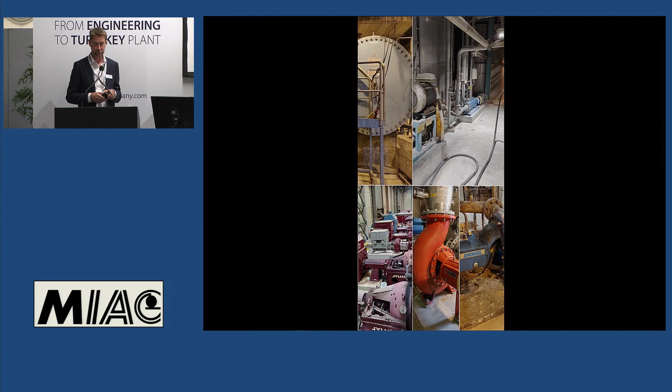As a starter, it looks like this, and if you work in a paper mill or deliver projects, you can think about how many equipment do you have? How many mechanical seals can you find in this plant of yours?

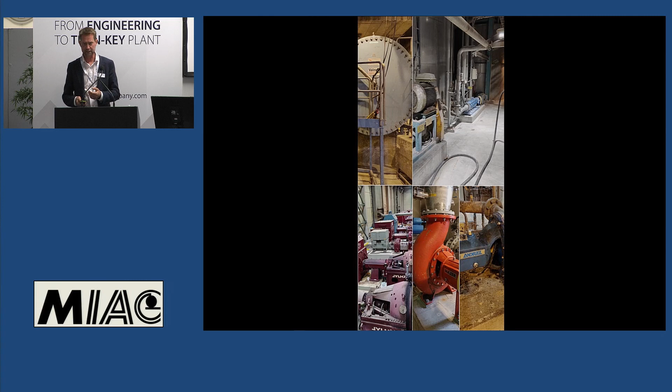And then we go to a bit of detail about the mechanical seals. Mechanical seals are categorized by their function. You can have a single-acting mechanical seal, double-acting mechanical seal, or quench seal. The idea here is that if you have a single-acting mechanical seal, you have one pair of sliding faces, and it's lubricated by the product, so your stock, the fiber suspension.

Then you can have a quench seal, which means that you have a bit of a flush in the back of the mechanical seal, which removes the leakage and gives a bit of cooling. That's a bit of a compromise between a single and a double-acting mechanical seal. A double-acting mechanical seal is then where you have two sets of sliding faces and you pressurize it with water. The idea here is then you have absolutely no leakage of the product, and the mechanical seal is lubricated better, so you get a much better performance out of it.

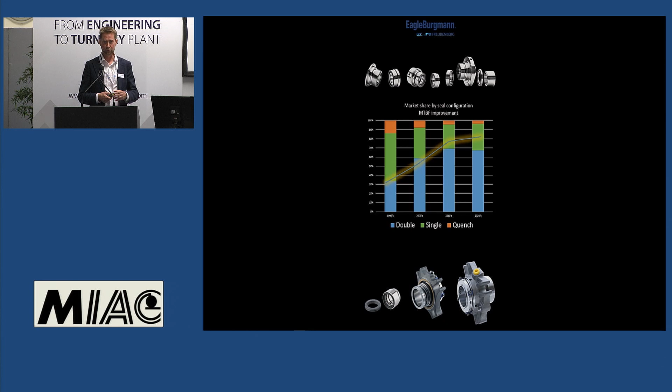Now, during the 2000s, our customers noticed that if you use a double-acting mechanical seal, the MTBF, the mean time between failure, goes up. So obviously, over the years in the 1990s, we delivered maybe 30% double-acting mechanical seals, but that grew to roughly 70%. And the quench seals are pretty much vanishing.

So we pushed, as an industry, to use double-acting seals, put in water in the seal, and you get better lifetime. Lifetime goes up from 3 years to maybe 6 years, 6.5, or something like that.

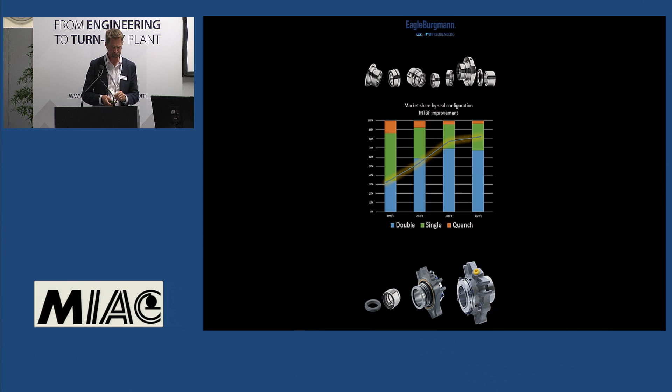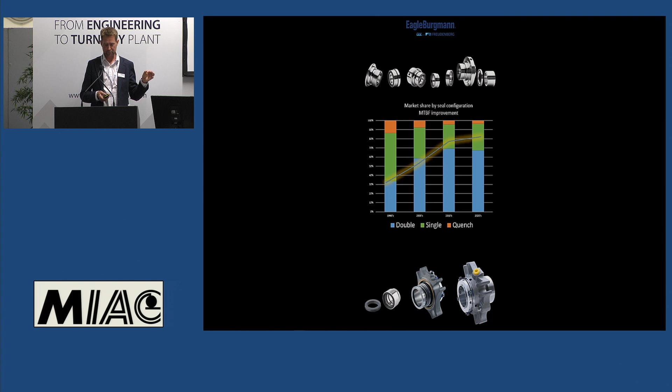So now most of the seals are double-acting, only condensate seals and pump seals are single, but at the same time, what did we do? We taught you to use more water. We doubled the amount of seal water that you're using in your plant.

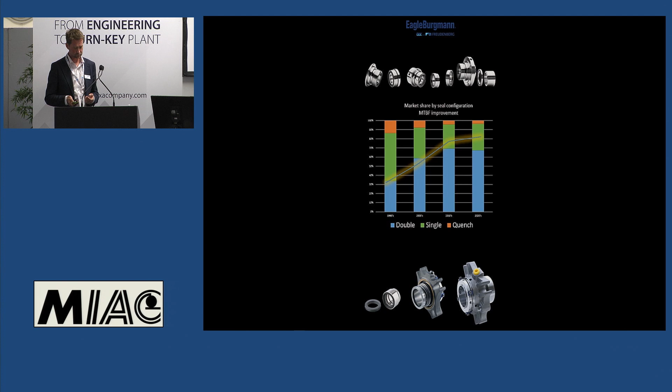So you have to somehow control that amount of water that you're using. Of course, engineers invent ways to reduce the water consumption. You can have thermosiphon systems, which are very popular in the chemical industry and oil and gas. This would be Plan 52, 53A, and so on. Or then you can have a water line.

Now, in a paper mill, you have lots of water everywhere. You have the water lines available. So this was a natural choice that you put a Plan 54 water line system to all these mechanical seals. Plan 54 sounds nice, but in essence, you have 2 Sulzer Ahlstar pumps or hundreds of ACPs, small size, and they produce all the water that all these mechanical seals in the plant use.

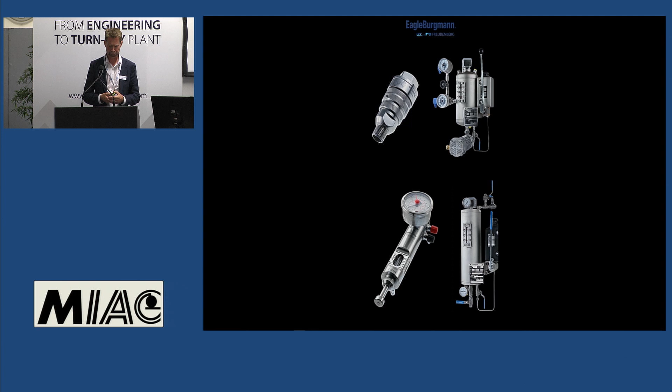But if you just connect the water line and flush it through the seal, that would be 10 to 20 liters per minute. So a company in Finland called Kytölä eventually came up with a flow control device, and now all mechanical seal companies are selling them. Different kinds, but in essence the same. You restrict the flow coming into the seal. You have 2 knobs where you control the flow and the pressure.

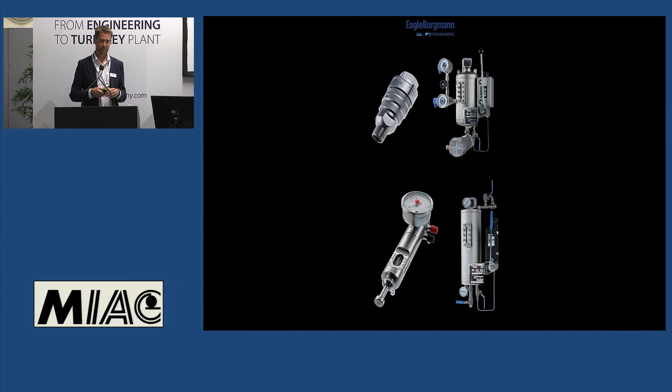So the point is, then we'll show you that you restrict the flow to 4 liters per minute, 2 bar higher than what you have in the pump. All good, but there are still 2 problems with this thing. 4 liters a minute, there are very many minutes in a year. So when you add it all up, that's quite a lot of water for one mechanical seal. And we made you double the amount of double-acting seals you had. So it all adds up.

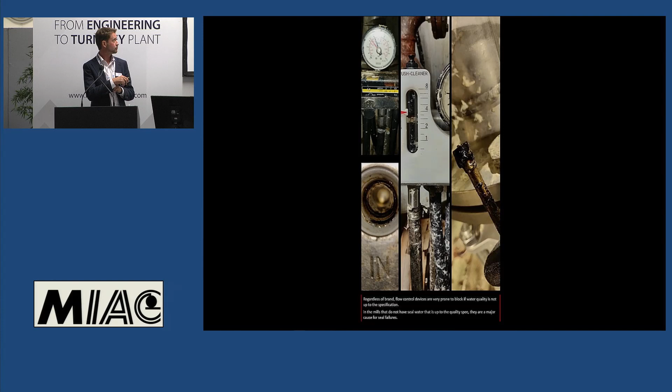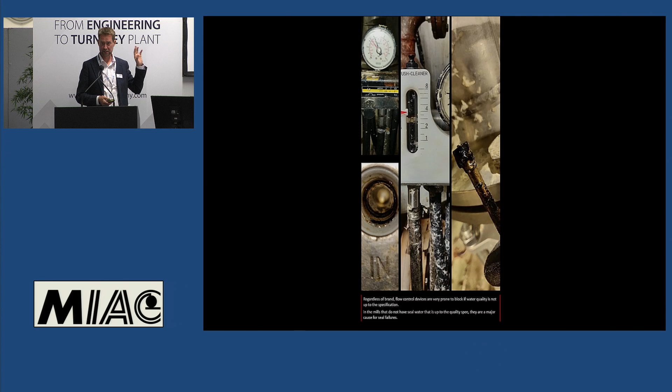And when using these, another problem in my mind is that they are in front of the seal. We specified that the mechanical seal water has to be very pure, but that is almost never the case. It's taken from the nearest river, mechanically cleaned, so it's not chemically cleaned water. It's not potable water, it has dirt in it, organic material. And regardless of whose flow control device you're using, this is in front of the seal, and all the dirt gets clogged in this equipment.

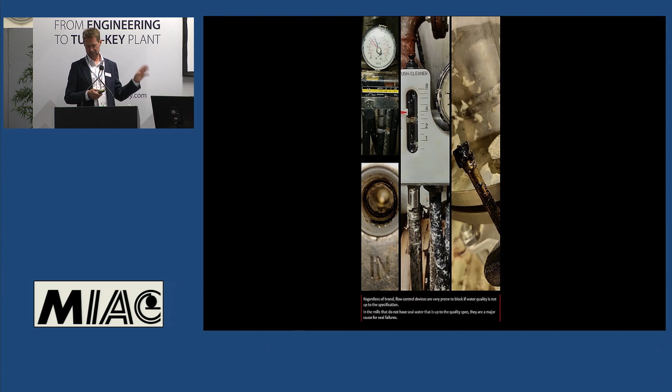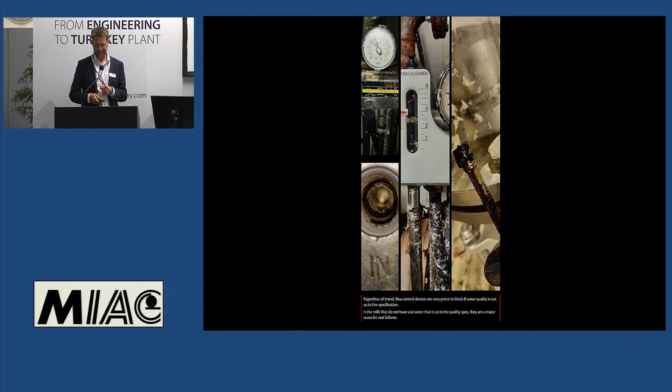So you have reduced the water consumption, but when this blocks, the water stops to the seal and it needed it for lubrication and cooling. So now we are breaking the seal, saving water, but at the same time causing problems with this water saving and restriction of the operation. But anyway, this is what we have been doing all the time. We have been telling 2 bars above the process pressure, 4 liters a minute, adjust it, install these kits, and you put them everywhere in your mill. And my personal opinion is that this is perhaps not the best way to do it.

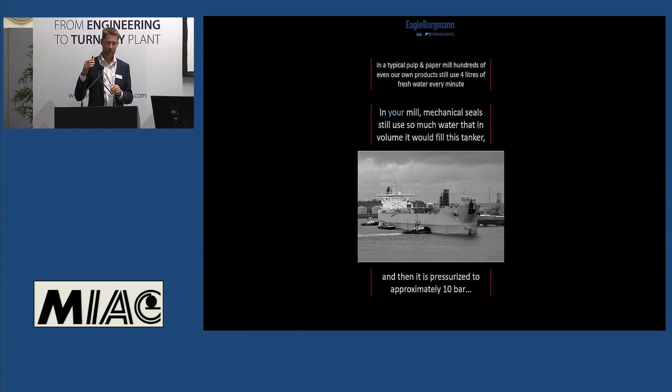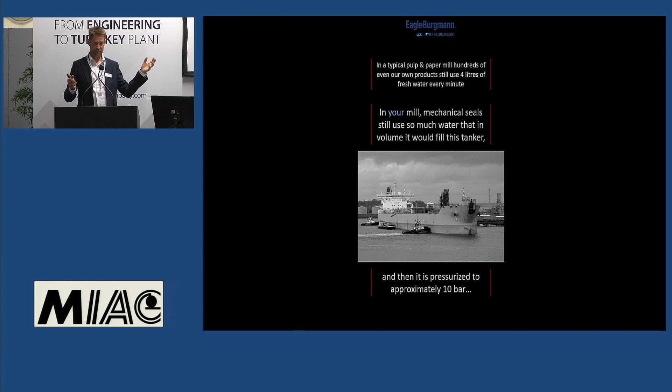So if we take a bit of a story now, the number of mechanical seals or pumps and equipment that you have in your mill varies by mill size, but let's say 50 to 200. That's the amount you typically have in a smaller tissue mill or a larger two-line carton board mill or whatever. When you add up all the minutes and 4 liters per minute, it adds up to 2,000 cubic meters per mechanical seal per year. Now when you add that times the amount of equipment you have, the total volume is going to be a tanker. If it's 50, it's going to be a small tanker, 50 times 2,000 cubic meters. If you have 200, the amount of water will fill a super tanker. That's how much water we're talking about.

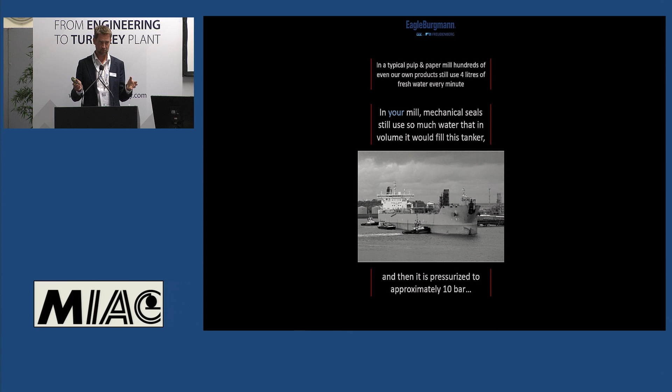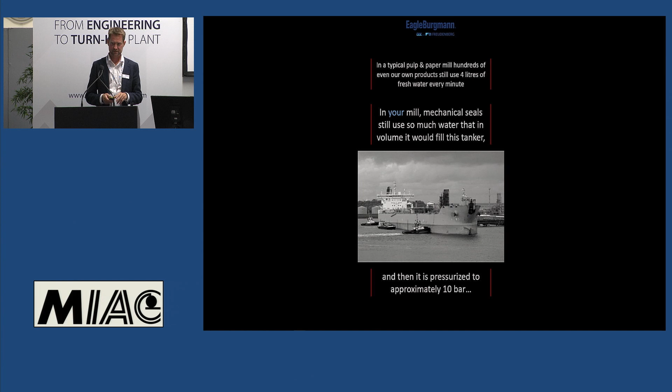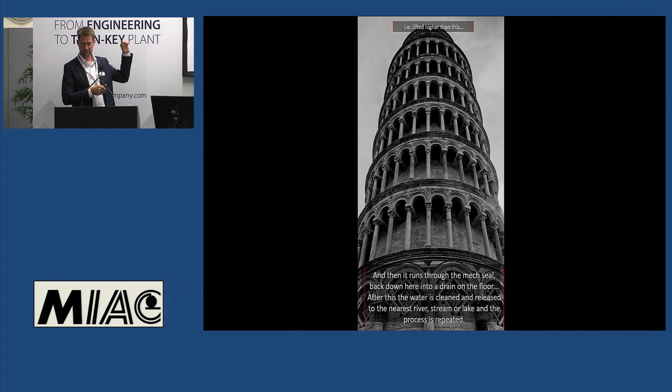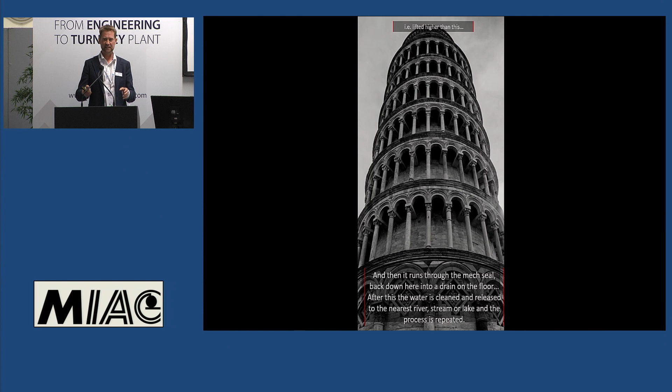And the next thing is that we tell you, you have to pressurize it with those pumps to about 6 bar, 10 bar, so that it's always higher than the process pressure you're running in those pumps. And what does that mean? It means you take that tanker and your seal water pumps, lift it all the way up here, up to a height of 60 meters, 70 meters. And after that, you open a valve, adjust it a bit, and all that water runs through the mechanical seals, down on the floor, where it goes to the canal and is collected, goes to the water treatment plant, you clean it up, and then you do it again. And the reason you do it is because for 40 years we have been telling you you have to do this. So we created a bit of a problem for you. If somebody would come and this had not been done before, they would say, are you insane? We are not doing this. But this is what has slowly happened in the mechanical seal industry because the seals need that water.

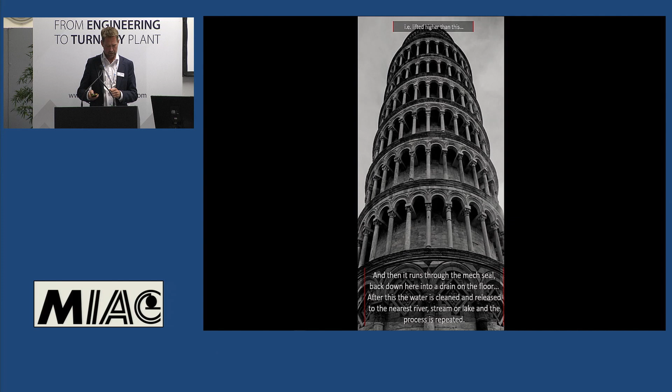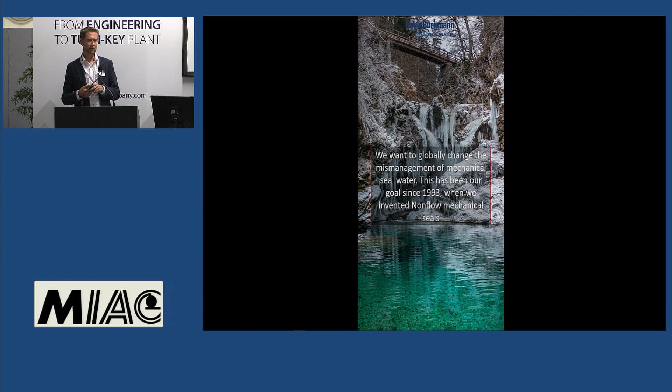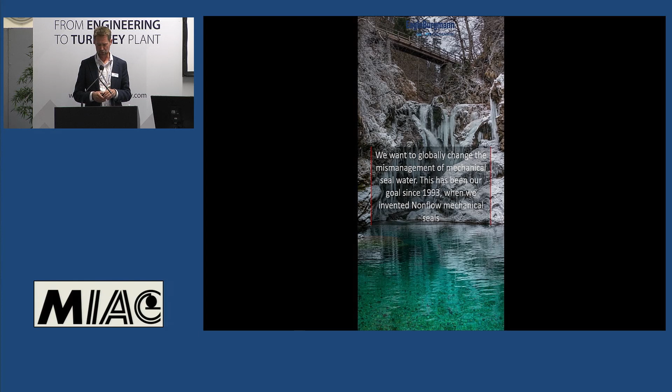But we want to change this. And right now we want to globally change this idea. We have been trying to change this since 1993, but a bit like in the previous example, we have been working in Finland, testing every application, every mill, what can we do, what can't we do, since 1993. And the key takeaway of this slide is that obviously we are extremely bad at selling, because it's 2021 and now we are here.

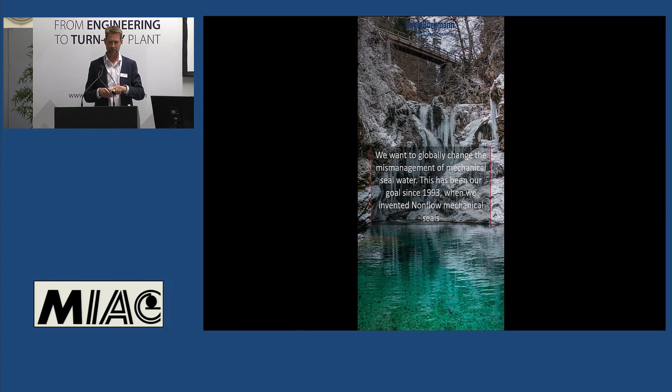So the product looks like this, and the main message of this whole presentation is that you do not need to use flowing water in mechanical seals in your mill. That is the key point.

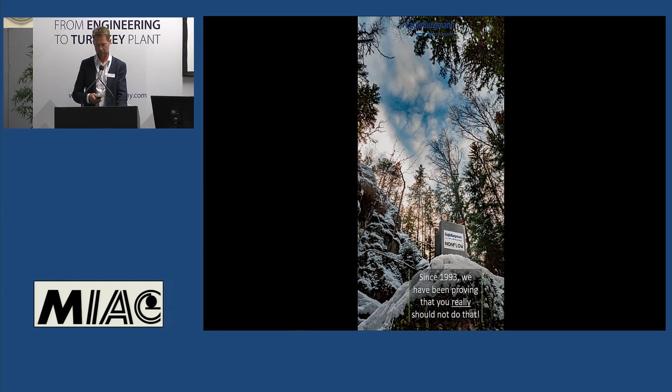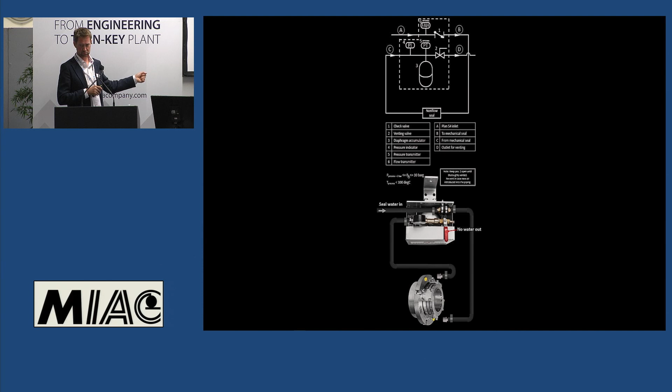So here you have basically what the idea is. We have the mechanical seal, a non-flow mechanical seal, that's what we call it. It has a technology that doesn't need cooling. It needs the pressurized water, but it doesn't need cooling, no flow. So you have the water line coming in right here to this system. Then it goes to the mechanical seal, back and out. And the only moving part here is that valve that you use only when you vent. You flush all the air out of it and you close it. Done. After that, the mechanical seal doesn't use water. You still need the pumps, you still need a 6 to 8 bar line, but it doesn't use 200,000 cubic meters of water every year. And in addition, now there is no flow bringing that dirt into the system.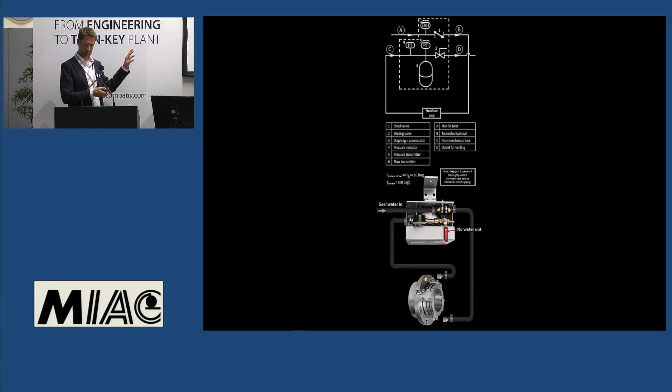So at the same time we did this, we found out something else as a bonus, but I will get back to that. Often when I present this to maintenance managers at mills, that you can save this much water, I get the reaction: so what?

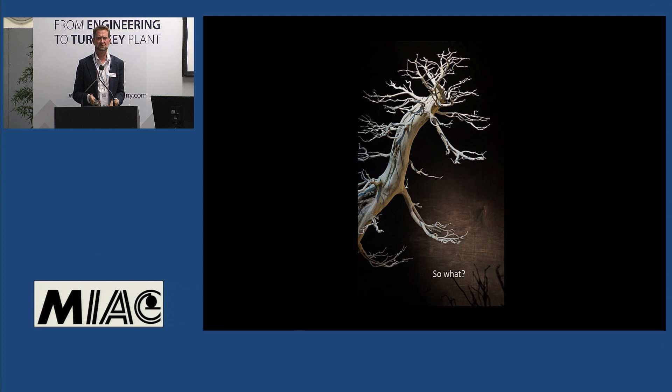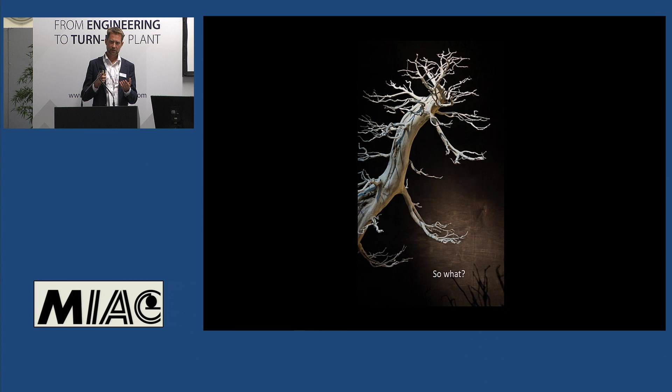100,000 cubic meters of water, so what? We use 4 million, it doesn't matter. But the fact is that these days all the companies look at how much energy they use, like in the previous presentation, how much water they use, and they're interested in that, and anything we can use to make it more efficient is interesting.

Mechanical seals are a simple way to improve this. So even if the initial reaction for maintenance might be that it doesn't matter, when you add all those together, we're talking about hundreds of thousands of cubic meters of water, and it's easy to change. Just look at the product, think about it, and start implementing it during regular maintenance or a project.

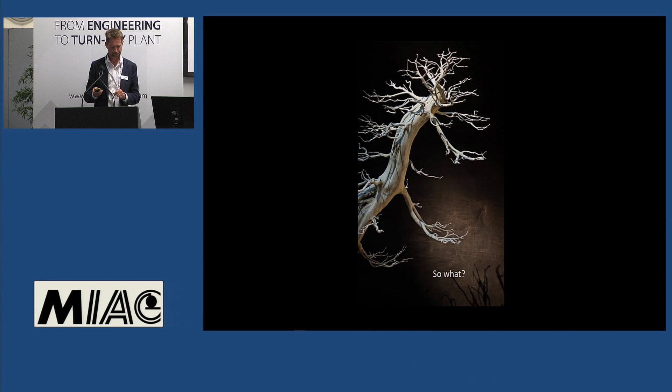So even if our exports are just starting, we have been looking at export markets for the past 5 years. We have been doing this for a long time in Finland, and right now our sales with non-flow systems are doubling every year.

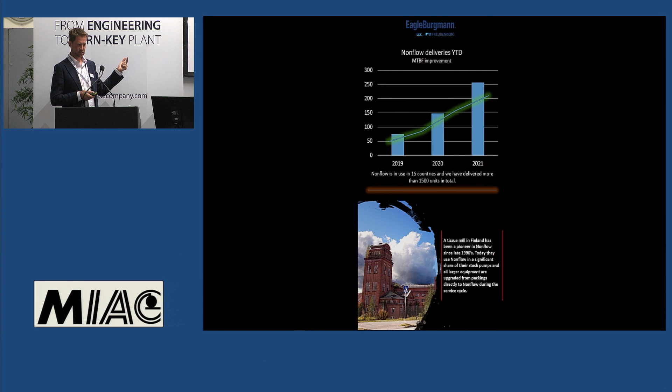What's interesting is we have now delivered more than 1,500 systems, but we found out also during these years that the MTBF goes up, because it's easier to maintain a steady pressure than to maintain flow and pressure. So now we found a way to even increase, from a double acting seal, the mean time between failure. That just came as an added bonus when we started to save seal water.

Now the double acting mechanical seal works as long as your bearing, and that's the target. That's where you save the big money. You also get a lot of water savings, but this is also a key takeaway.

And finally, I can show you a couple of references. We have lots of them in Finland, a few in the UK, a bit in the Netherlands, countries where there's not too much water, and then also some cases in Italy.

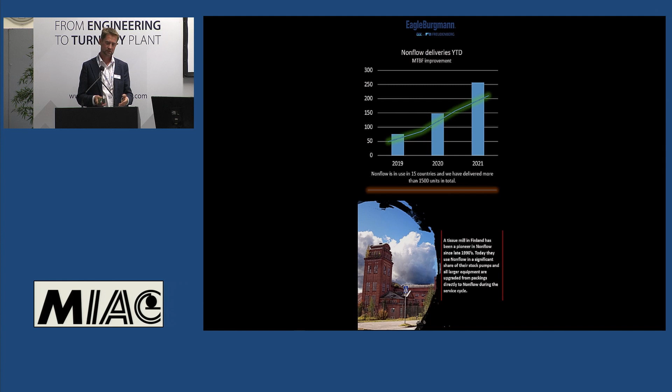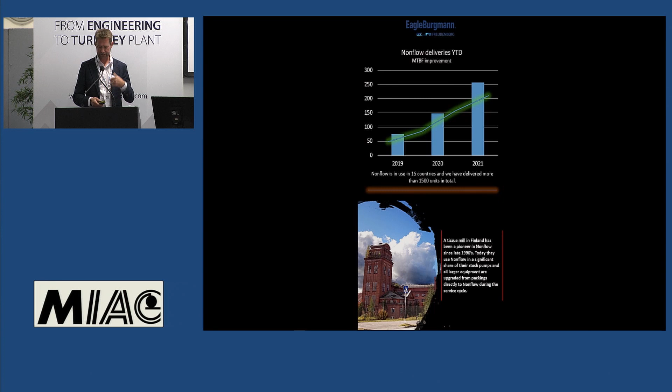As a starter, we have a tissue mill in Finland. It's interesting because they were the first that started doing this on a bigger scale with us, so that's where much of the testing happened. These days, when they upgrade, for example, a Valmet Optifiner from packings to mechanical seals, they ask the OEM to put in a non-flow seal immediately. So they will not put in water use, they just get all the benefits and no water use. Now, during the service cycles, they do this all the time.

Then we have one company that has given us permission to say their name because this is in their DNA, let's say. They want to be very much of the circular economy and sustainability mindset. That's Kotka Mills, now part of the MM group. They had a project where they converted their paper machine to a carton machine, so there's one paper machine, one carton machine.

During that conversion, they specified non-flow, so we put in 60 units at the same time. Also, they have been adding more and more units in the service cycle. So when I made this presentation, they had 93 systems running. That's 200,000 cubic meters of seal water that they have been saving. That's already a supertanker amount of water.

Then just recently, we have had a customer who has been using our mechanical seal for the past 5 years. The maintenance manager said, how can we speed up this water saving? He wants to have the world's first paper machines that use no seal water at all. So on the 1st of January, we started a contract. We take care of all their mechanical seals, and we promised that we change between 12 and 15 mechanical seals to non-flow all the time.

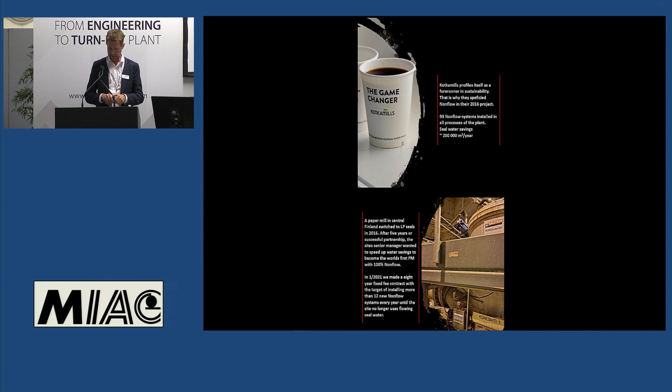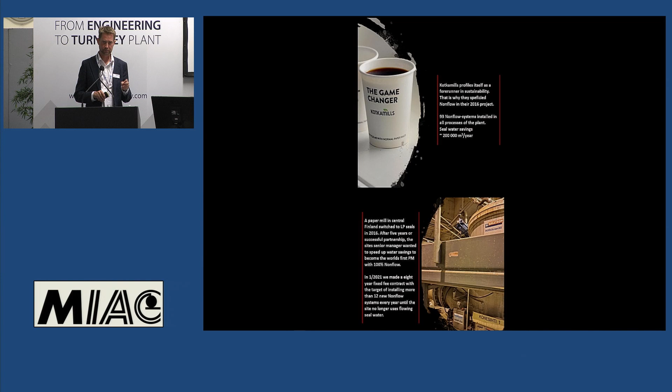So right now, they are running 51 units. Every year we put 12 to 15 new ones in. By the end of 2028, they will have no water consumption for mechanical seals in those 2 paper machines anymore. When that is done, they're going to save 300,000 cubic meters of seal water every year. They will get a better MTBF, and that amount of water is roughly 4% of their complete water consumption.

And it was a very simple project for them to do: one contract, you take care of it, install Nonflow units, 2,000 cubic meters per seal, and by the end of 2028, no water use left.

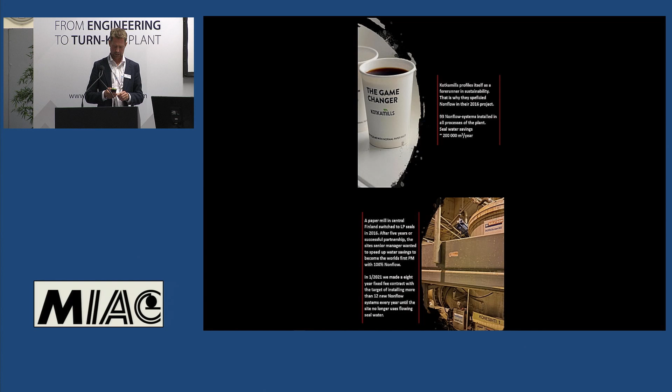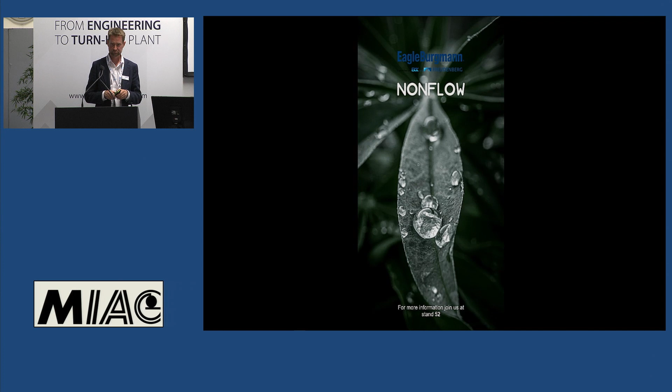So, this is the idea. It's called Nonflow. We've been doing it since 1993, but now it's perfect. There are no surprises left. We know everything, every application in pulp and paper. If it's a tissue mill, a carton mill, a paper mill, we have done all the applications with double-acting seals. If this is interesting for you, you can join us at our stand, EagleBurgmann, stand 52. Happy to tell you more. Thank you very much. Thank you.

Well, maybe you're not a bad seller, but you're a bit in advance. I mean, it's a question of time. And water was not a priority in the past, but for sure it will be in the future. Now most of our focus is on energy, but for sure water will be the next issue. Lifting that tanker up is also energy. Exactly.

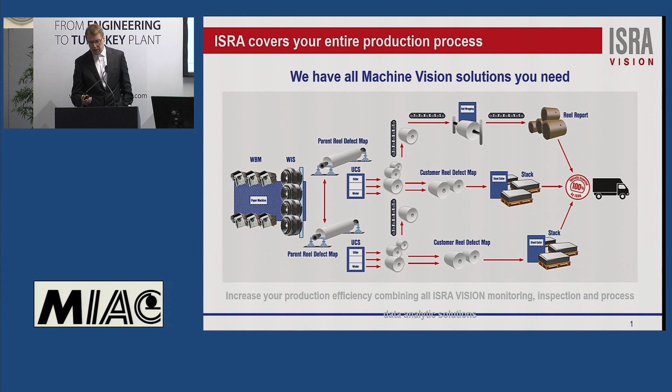I'll take this bit by bit, starting with the web break monitoring. That's literally process monitoring where you have cameras on your wet end, your press section, and maybe a dry end if you happen to have that in your machine. You can get really good image quality with our cameras. I'll talk a little bit about the cameras later, and you will have low maintenance cost on these.

The web inspection system is really a quality process control system that gives you a good view on what your sheet looks like. You have really good cameras, fast cameras, and a reliable classification of the defects you have. Another thing you can get from us is middle cut inspection in case you're running double width sheets. It'll give you automatic tracking for your cut positions. You can monitor the cut widths, and you can also see a perfect report of the sheet that you're actually delivering forward in your process.

And then you have a paper quality management system that is also a complement to our monitoring and inspection systems, that can give you process analytics onwards in the process.

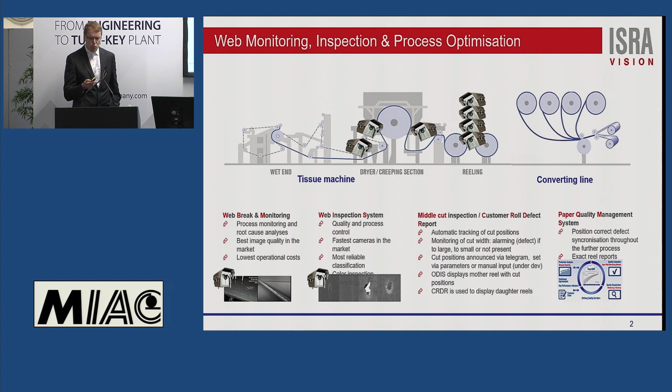If we start with the cameras, our Intellicam cameras are very robust in their view. They are built with a waterproof surrounding. It's really good image quality. We have our illumination built into the cameras, and we also have high definition image cameras in there, so it'll give you a special lens for full scale. You have ultra bright white illumination, so you can get very good pictures of, for instance, this is a trim squirt. You have a system that can handle the worst of the conditions.

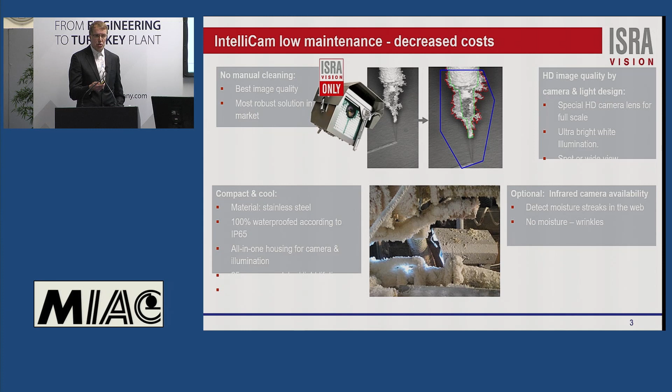These cameras work up to 110 degrees surrounding, so they can manage most of the surroundings. Another option that we have nowadays is that we can put an infrared camera in the camera, which can give you the ability to see wet streaks, moisture streaks. So that will give you an extra addition if you happen to have that kind of issue on your machine.

If you look at what the WIS system looks like, this is like a camera beam with the cameras on top. Then it can detect whatever is in the sheets with the pictures. And if you happen to get a break on your sheet, it immediately sends a signal to the web break monitoring system, and then you get pictures of exactly where the break originated from. So it can read every single point of the machine. Typical examples of where you can get these sort of problems are edge cracks, for instance, or if you have holes in the sheets. That's typical of what you can see here.

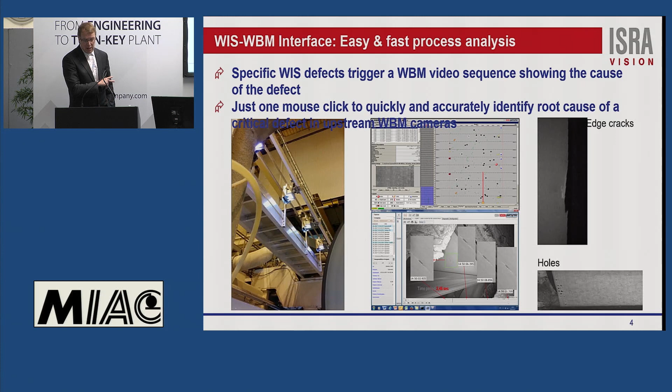Another thing we have in our system: if you look at this sheet here, it looks like a giant sheet of mosquito bites. That's literally how sensitive the system can be in the setup, so we detect everything that goes on the sheet. What we do then in our algorithms is take out the most significant things here, and we can find the repeatability of things.

If you have a repeated error in your sheet, we can start tracking its position, and we can go back and assign that to a specific part of the machine, whether it's a forming fabric, a press felt, or whatever.

I'll show you one slide later where you can actually use this to design a report for the machine to go and clean that part automatically. So we can use the WIS system to run your cleaning sequences, if you want to put it that way.

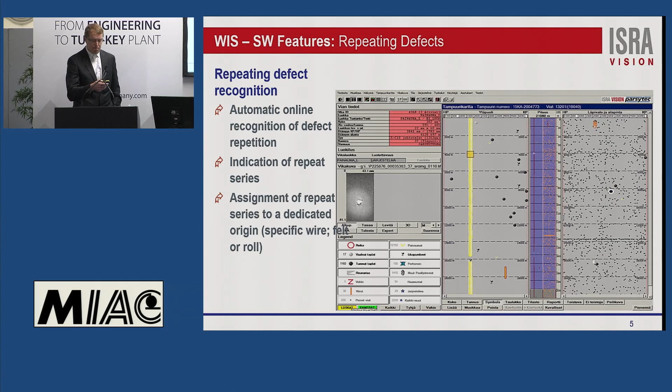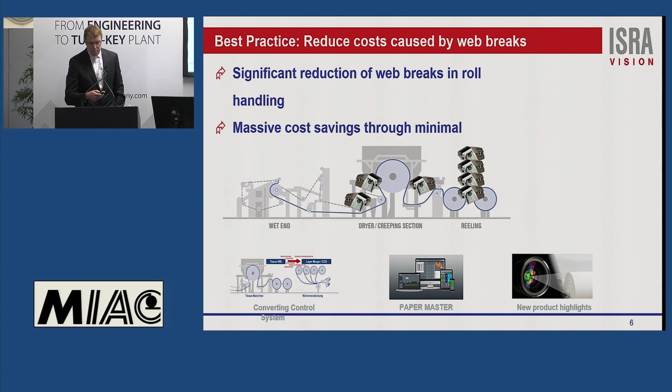So literally, you can reduce your costs by following your web breaks properly and assigning the reasons for them, and you can also save money that way because you're minimizing the amount of it.

When you come to the quality part, you can optimize your costs because every time we make these reports in our web inspection systems, we take out a full roll report of every roll we designate. That roll report gives you an idea of how good the roll is - can I really ship this to my most sensitive customer, or do I need to designate it for something else?

In that roll report, you can have the edge defect report, the roll report, and you can also add information from your own systems to this roll report. So you can have a quality management document out of these measurements.

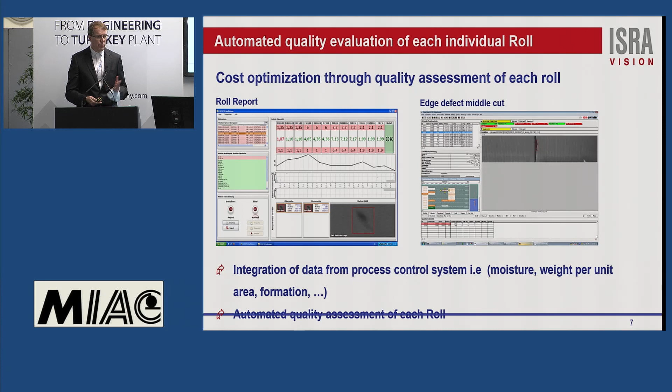Typically, another thing you look at with tissue machines is that you really don't want critical defects in the tissue reels, because if you think about the next step, you go into the converting line, and when you put in 1-ply, 2-ply, 3-ply, or 4-ply tissue lines, you need to follow where you had issues on the original roll.

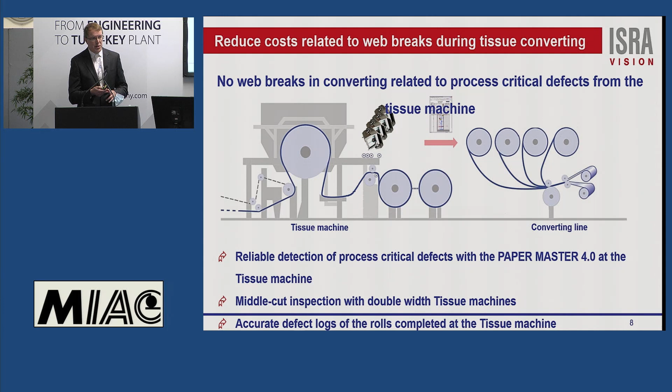So we have the roll report, the middle cut reports, and the actual defect logs on every single roll, and we put those into the report here. We always send the binary data to your converting line, so each and every parent roll can be synchronized.

So if we find out there is, for instance, a weakness in one part of your parent roll, we can signal your system that now is a good time to slow down the speed, because otherwise you might break. It automatically traces this part, so we can use a system where you reduce web breaks in converting. This is the linkage between the machine and the converting.

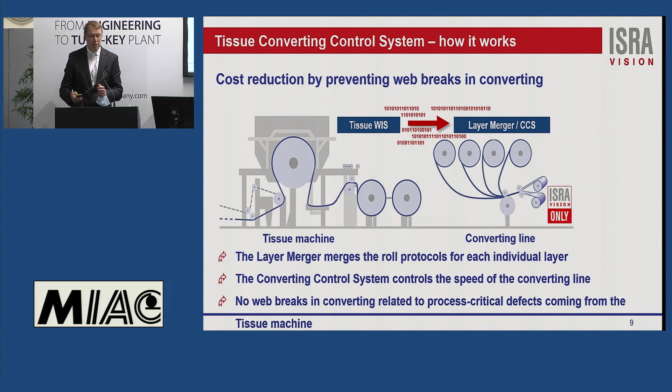When it comes to process control, we also have a system with artificial intelligence algorithms. We work with the Paper Master, which is the name we call it. We have web quality and process analysis here, and you can access this globally - it's one platform, accessible either via your web, if you have a VPN connection, or conventional PCs.

You can even put it on a virtual network inside your own mill, in case you have a system where you don't want more monitors on your screen. You can set it up that way.

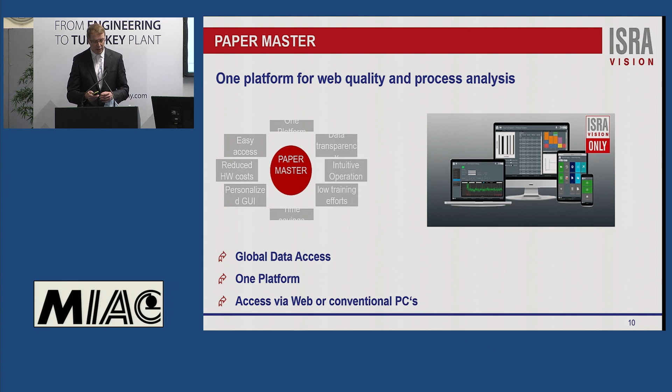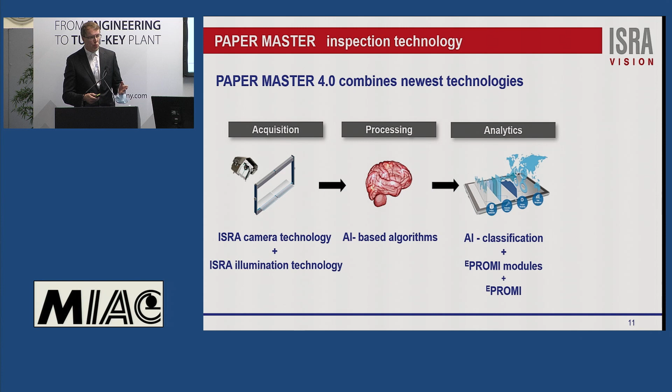So literally, the inspection technology works this way: you have the acquisition of data through your Intellicams, your web break monitoring, your web inspection systems, your illumination technology. Then you have the artificial intelligence algorithm processing, which handles the classification. And then we have something we call ePromi modules, which I'll come back to, because that's the software tool we utilize inside of this.

So if you think about the artificial intelligence-based classification, we use deep learning algorithms after the first premium classifier that we put into the system. And the reason why we call it artificial intelligence is that we've made sure all of these systems globally have built up a huge library of defects, so we can start by putting all of those into the system initially, giving you automatic best feature selection to start with.

So the only thing your operators need to do is assign the name of the class of the defect. You'll find different kinds of features on every single defect. These defects are then put into the algorithms, and you can follow onwards what you can do with it. That creates a very fast startup when you begin using our systems.

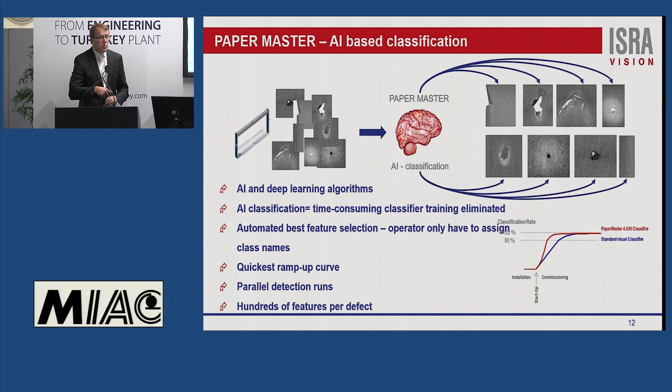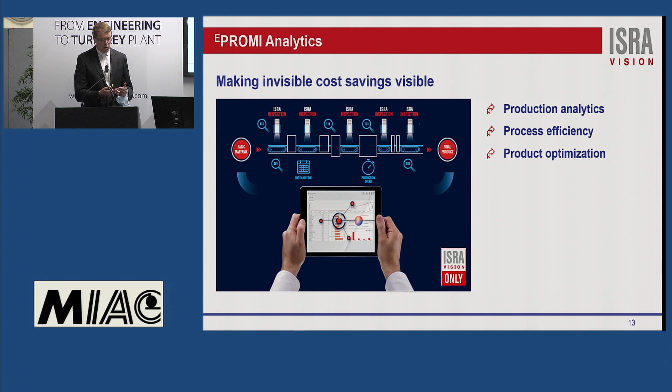The ePromi analytics is production analytics, literally. It improves process efficiency and product optimization, because what you have here is a status quo picture of where you are with the systems we've implemented, the web break monitoring, the web inspection systems, and you can also add whatever you want from your own process systems into these QMS systems.

It gives you the software view on exactly where you stand on the head box, the trims, the pickups, wherever you have a camera. So that gives you an optimum balance on how you can follow your own production.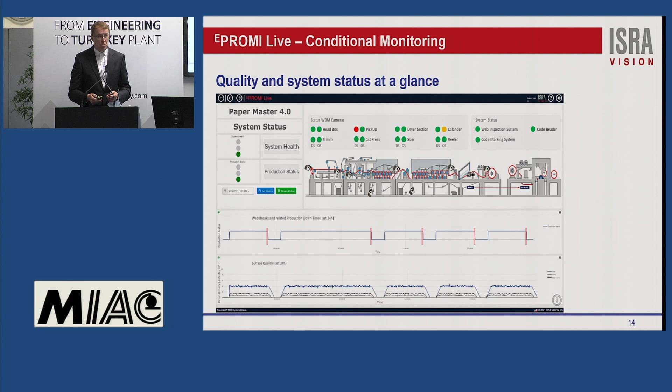Here we go with a specific instrument. When I spoke earlier about repeating defects, for instance, if a repeating defect turned up in your machine, say in the left edge of the sheet all the time, what we can do is utilize that signal from our web inspection system and send it to your operating system for the cleaners, the felts, the wires, and guide it so that this place on the machine gets more cleaning, for instance.

This will give you improved lifetime on your fabrics and press felts, and it will also keep the system clean where it needs to be clean. So instead of cleaning all over, you can save water, as we spoke earlier, by specifying where you put it in.

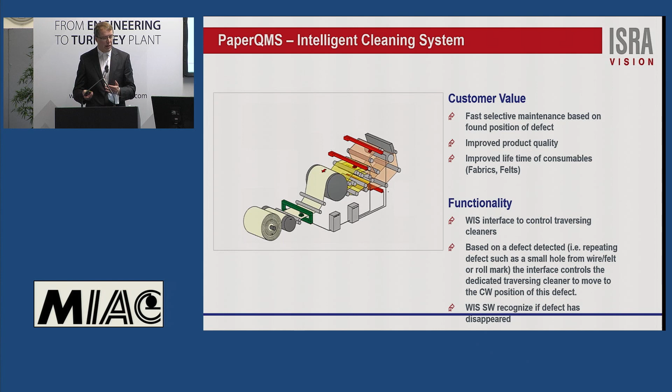And then, of course, once you've done it, the web inspection system will confirm that the defect has disappeared. That way, it gives you the indication of whether or not it has worked.

So let's go into a quick summary here. ISRAVision has been focusing on customer value for the last 35 years, and I want to say we're not only working in the paper industry — we're a global leader when it comes to machine vision, because we also work in automotive, plastic, security, glass, non-wovens, etc. Wherever there's a machine vision solution, we've been working with it.

We've been working on this for over 35 years since we started the company, and nowadays within ISRAVision we have over 900 employees, with 3 manufacturing facilities — in Atlanta, in Aachen, Germany, and in Shanghai, China. And to add to this, to show we're a global player, we were purchased last year by Atlas Copco, so I now have another 39,000 colleagues around the world.

So we are really a global player that can be around, and some of our esteemed customers have allowed us to give some comments on what they experience working with us. We have more than 10,000 installations in more than 50 countries.